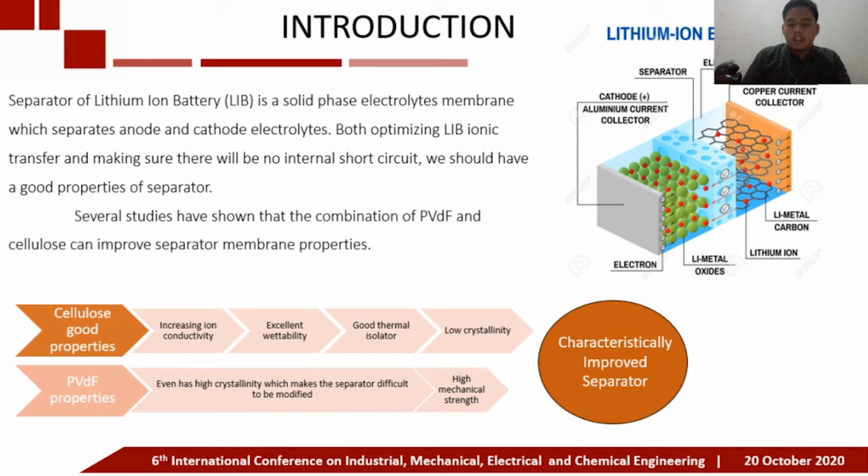So the first method is casting. Casting is one of the most common and widely used methods of manufacturing cellulose-based separation membranes. There are several important parameters that affect the quality of the cellulose separator membranes made through the solution casting process, such as cellulose concentration to area, ratio of cellulose to dispersing media, and drying process. Casting itself can be said as the most standard method for making separators. Casting has a simple preparation stage and doesn't need much equipment.

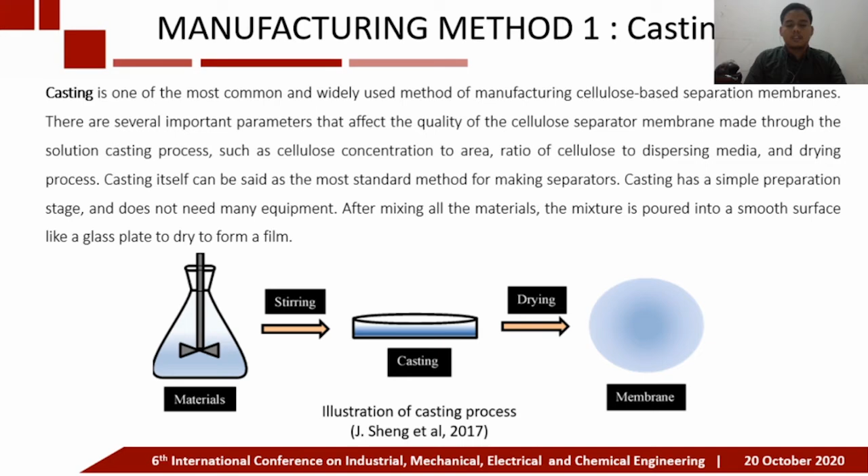We can see in the picture, the first step is after mixing all the material, the mixture is poured onto a smooth surface like a glass plate to dry to form a film. Casting has two methods. First is solvent casting. Solvent casting is the simplest film manufacturing method and is one of the oldest methods of manufacturing. The way this method works is that the existing material is dissolved into a volatile solvent, and the liquid solution that has been obtained is then poured on a flat and smooth surface so that the solvent evaporates.

The second is doctor blade casting. Doctor blade casting is one technique that is widely used to produce a thin film over a large area surface. In the process, the material is first dissolved into a certain liquid. After a fluid with sufficient fluidity has been obtained, cellulose concentration must be kept low. The mixture is stored onto a clean glass plate and spread with a doctor knife.

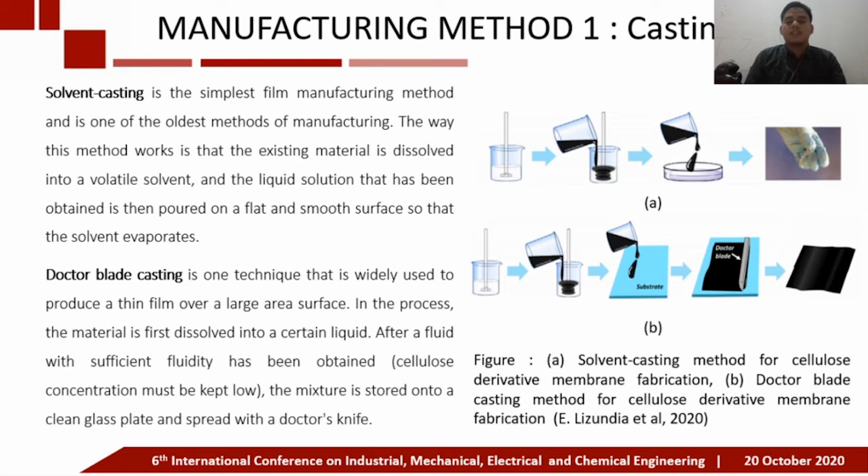The second method is phase inversion. Phase inversion is one of the several methods that has been used in preparing membranes for batteries. The concept of phase inversion method is separating the membrane from the solvent by exposing them to high thermal or dipping them into anti-solvent so the membrane will remain, meanwhile the solvent will exfoliate. By exfoliating the solvent, the membrane will have pores spread on the surface with diameter that can be measured. This is called porosity. Study has shown this phase inversion method can be a promising method for a large-scale process. We can see in the picture that this is the schematic phase inversion method.

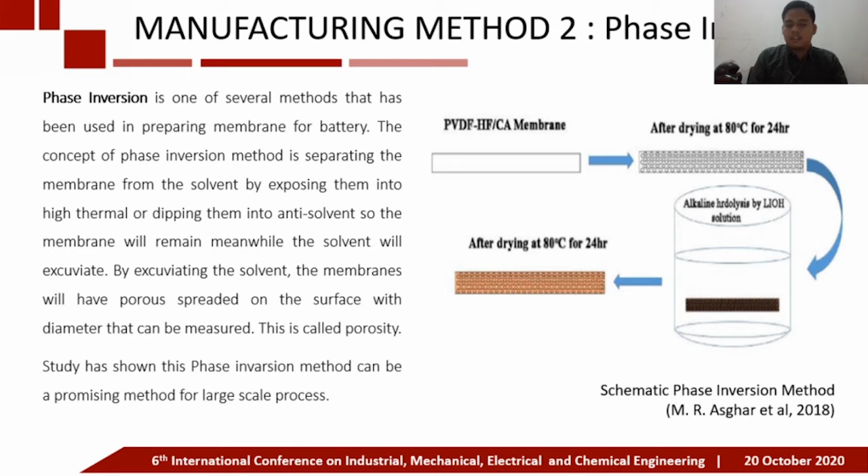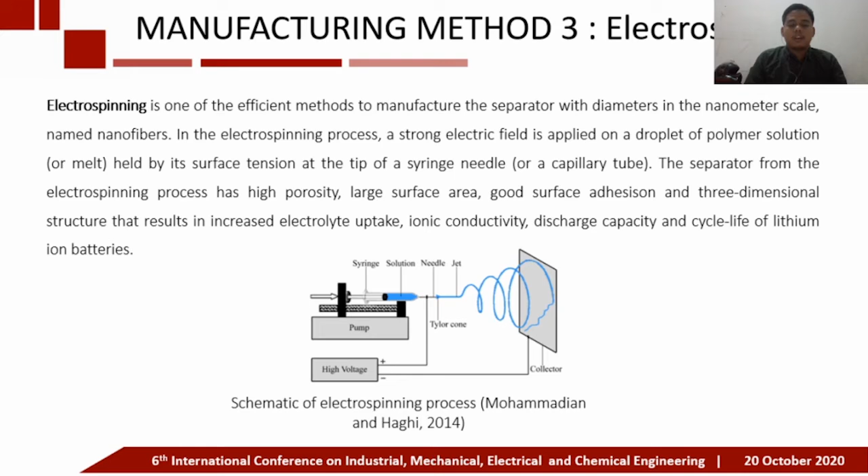The third method is electrospinning. Electrospinning is one of the efficient methods to manufacture the separator with diameter in the nanometer scale, named nanofibers. In the electrospinning process, a strong electric field is applied on a droplet of a polymer solution or melt held by its surface tension at the tip of a syringe needle or a capillary tube. The separator from the electrospinning process has high porosity, large surface area, good surface adhesion, and three-dimensional structure that result in increased electrolyte uptake, ionic conductivity, discharge capacity, and cycle life of lithium-ion batteries. We can see in the picture that this is a schematic of electrospinning process.

The fourth method is coating. Coating is one method commonly used in the manufacture of LIB separators. Commercial separators have disadvantages such as low melting temperature, poor electrolyte wettability, thermal shrinkage, low mechanical strength, low electrolyte uptake, and poor ionic conductivity. To solve these disadvantages, this method is used by coating the surface with a thin layer as a modification of a commercial separator. Coating methods have several types, including dip coating, gravure coating, and coating machine.

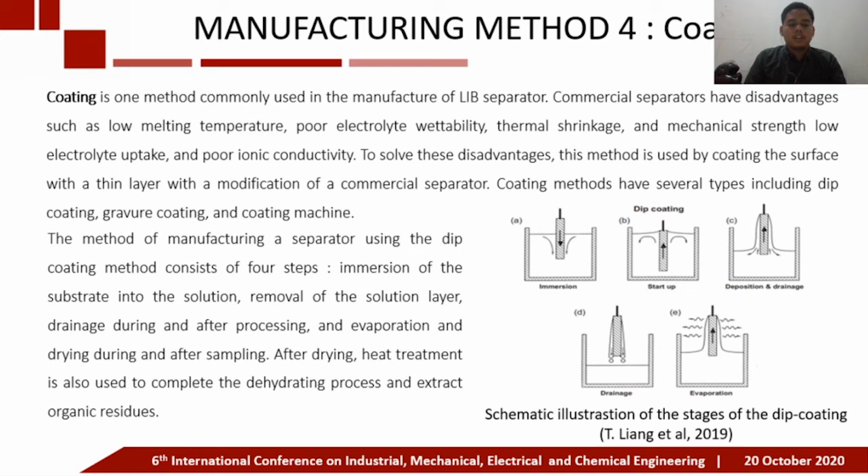The method of manufacturing a separator using a dip coating method consists of four steps. We can see in the picture, the first is immersion of the substrate into the solution, then removal of the solution layer, then drainage during and after processing, and next evaporation and drying during and after sampling. After drying, heat treatment is also used to complete the dehydrating process and extract organic residues.

The fifth method is vacuum filtration. Vacuum filtration is one of the easy methods to build a membrane as a separator. The concept is to take the solid part from the liquid by pouring them onto a filter. So the solid will be trapped on the filter while the liquid will be aspirated into the flask below. Cellulose nanofibers have been processed to be LIB separators by this kind of method and resulted in satisfying mechanical properties. We can see in the picture the schematic vacuum filtration method.

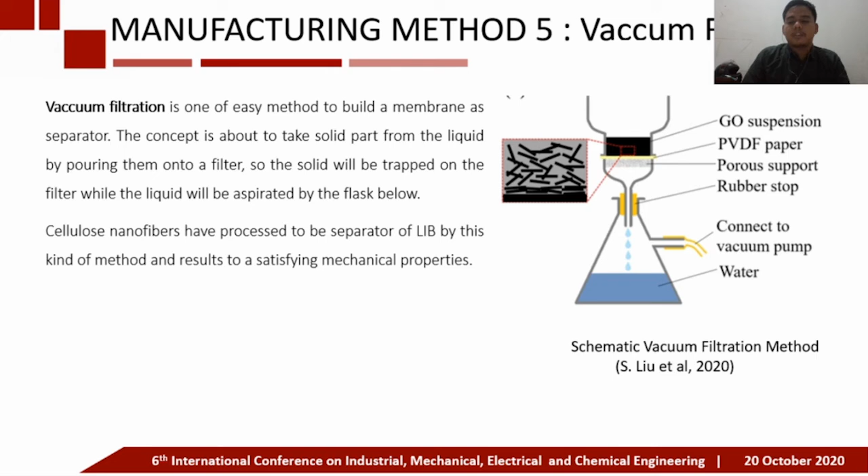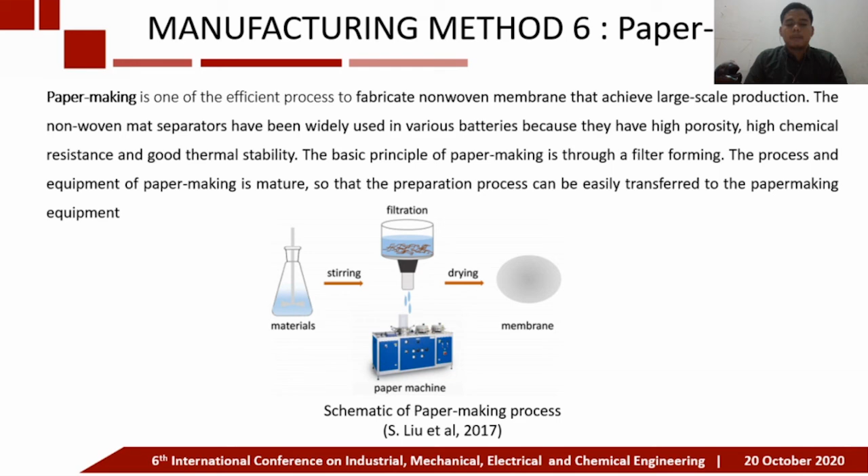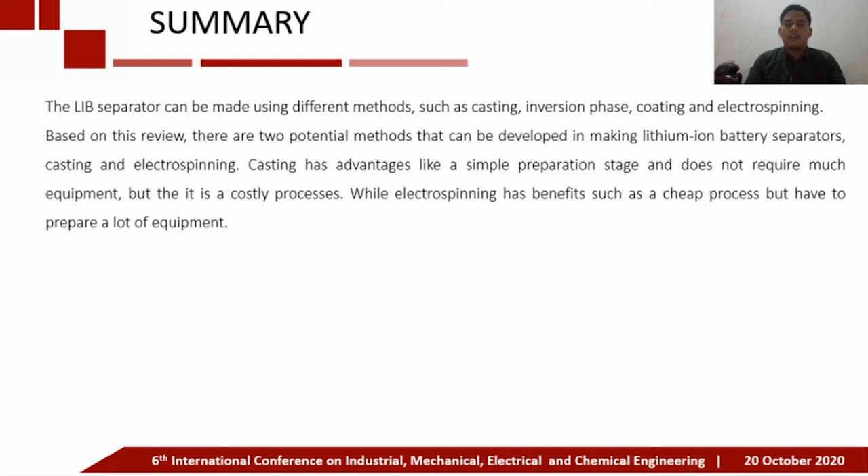Now, the LIB separator can be made using different methods such as casting, phase inversion, coating, electrospinning, vacuum filtration, and paper making. Based on this review, there are two potential methods that can be developed in making lithium-ion battery separators: casting and electrospinning. Casting has advantages like a simple preparation stage and doesn't require much equipment, but it is a costly process, while electrospinning has benefits such as a cheap process but has to prepare a lot of equipment. Thank you.